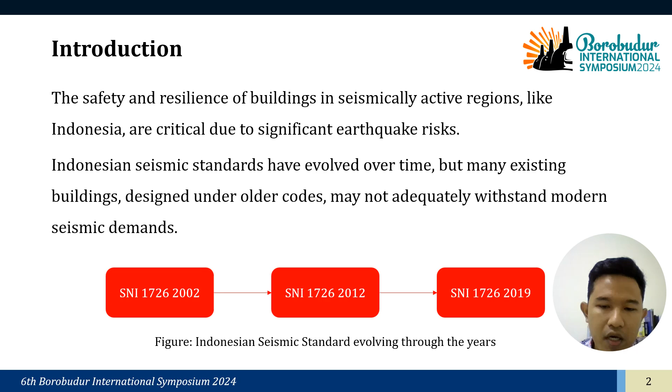Let's get started with the background of the research. The safety and resilience of buildings in seismically active regions like Indonesia are critical due to significant earthquake risk. Indonesian seismic standards have evolved over time, but many existing buildings designed under older codes may not adequately withstand modern seismic demands. We started at the 2002 code, then 2012, and lastly we have the 2019 code.

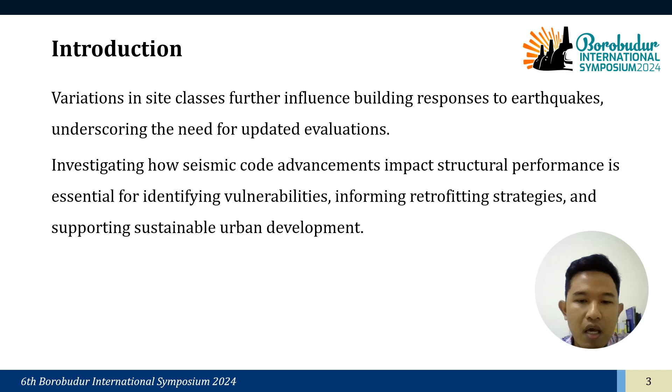Variation in site class further influences building responses to earthquakes, underscoring the need for updated evaluation. Investigating how seismic code advancement impacts structural performance is essential for identifying vulnerabilities, informing retrofitting strategies, and supporting sustainable urban development. This is the differences between the 2002, 2012, and 2019 codes.

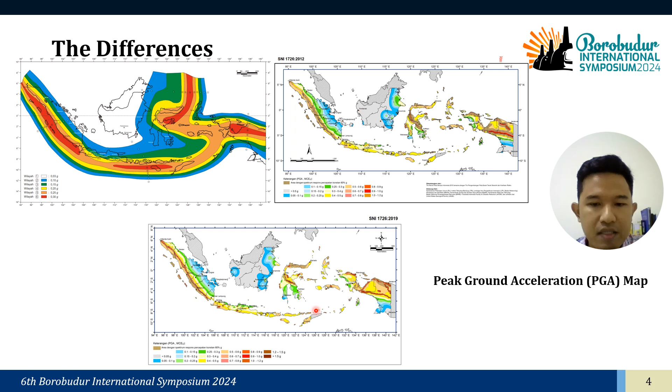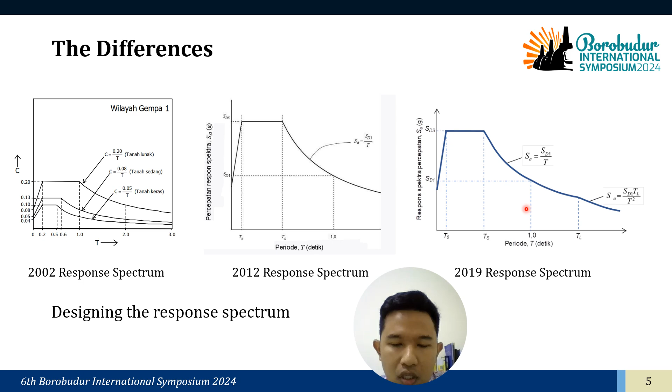This is the hazard map of earthquakes in Indonesia. And this is how we design our response spectrum from 2002 to 2012 and then 2019. This shows the differences between the codes.

In the 2002 code, we only use the zone-based response spectrum. In the 2012 code, we use the site coefficient, and in 2019 we use the same approach. The difference between the 2012 and 2019 codes is in the parameter response of the site class, the FA or FV.

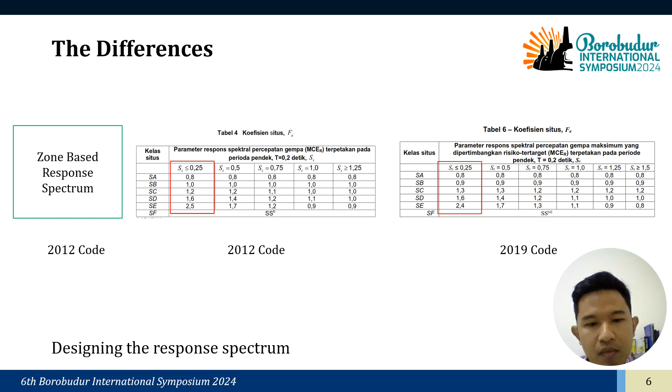So based on this, how does seismic code updates affect the forces acting on the structure, and how does the structure respond to the increased demand for capacity caused by evolving seismic provisions?

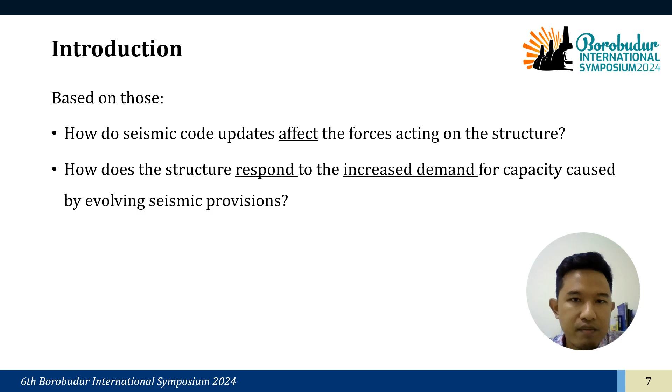The method we use is finite element modeling using ETABS with the data as follows: a four-story building with concrete, grade of concrete 30 MPa, and grade or FY we use 420 MPa.

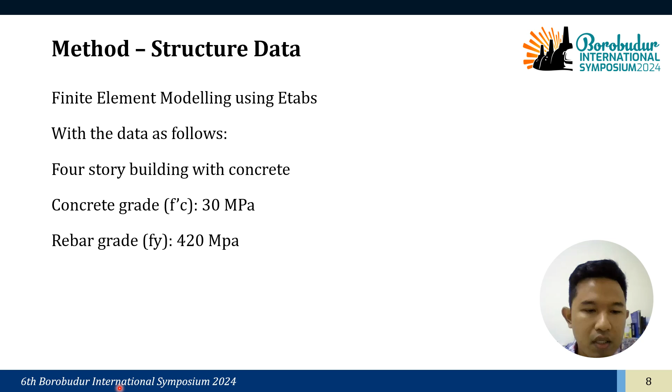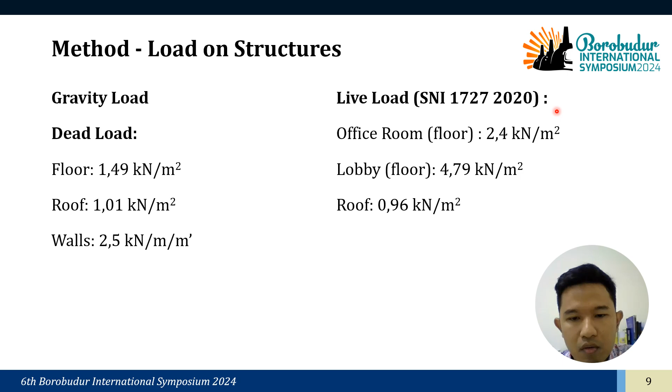The load on the structure includes the gravity load. For dead load, we use on the floor 1.49 kilonewtons per meter squared, on the roof 1.01, and walls 2.5. The live load is based on SNI 1727-2020, with office room, lobby, and roof considered.

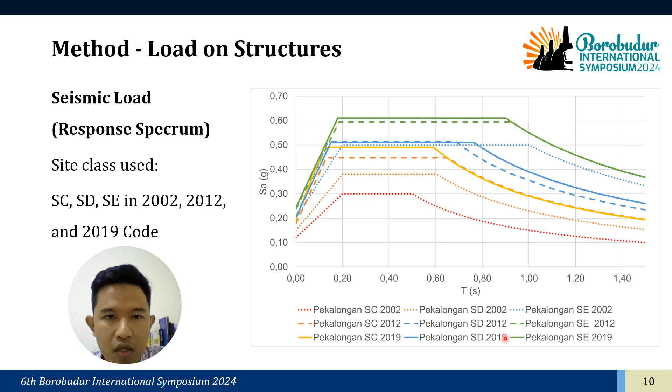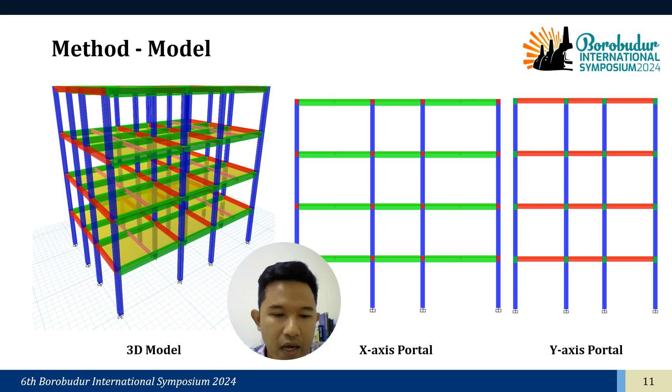We now come to the results and discussion. This is the joint reaction results. As we can see here, at FX for SC, SD, and SE, the EX combination gives higher values than the FY from the EY combination.

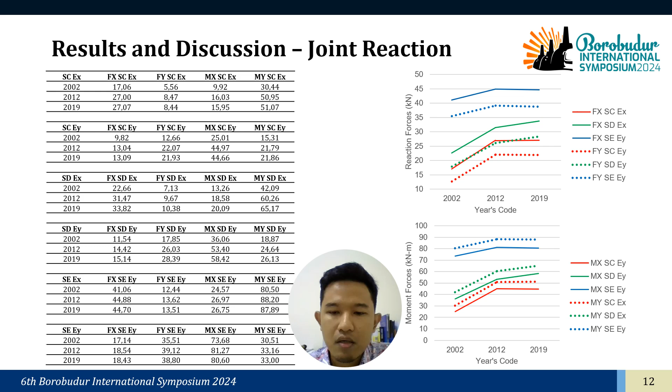Respectively from the bottom, these are the moment forces. The moment forces, specifically MY from EX, actually give higher values than MX for each of the standards.

This implies that from 2002 to 2012, significant increases are observed in all parameters. Site class SC generally shows larger percentage increases compared to SD and SE. SD parameters experience a moderate increase, from around 25 to 45%.

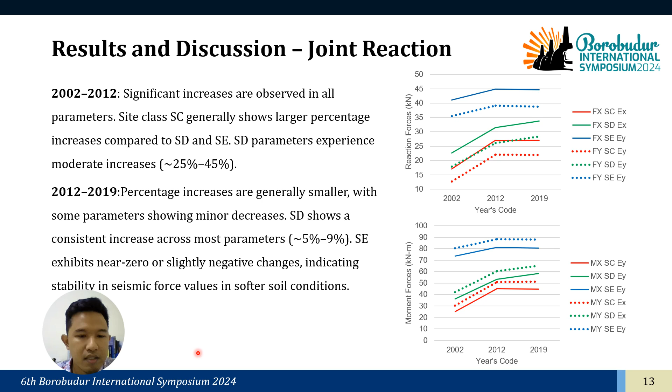From 2012 to 2019, percentage increases are generally smaller, with some parameters showing minor decreases. SD shows consistent increases across most parameters, around 5 to 9%. SE exhibits near zero or slightly negative changes, indicating stability in seismic force values in softer soil conditions.

From the beam forces at the midspan beam, from the shear force or V2, the increase in the shear force over time reflects the evolution of seismic codes, particularly for SC and SD, where stricter provisions led to higher demand on the beams, as SE shows less variation, likely due to higher initial design provision in 2002.

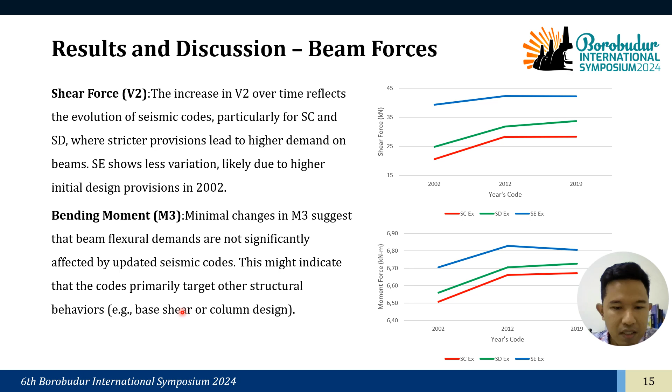And then the bending moment or M3. Minimal changes in M3 suggest that beam flexural demands are not significantly affected by updated seismic codes. This might indicate that the codes primarily target other structural behaviors like shear or column design.

Now this is the beam forces at the end of the span of the beam. Significant increases in V2 from 2002 to 2012, reflecting stricter seismic requirements. From 2012 to 2019, changes are minimal, indicating stabilization in code provisions. Site class SE consistently experiences the highest V2 values, consistent with softer soil conditions amplifying seismic forces.

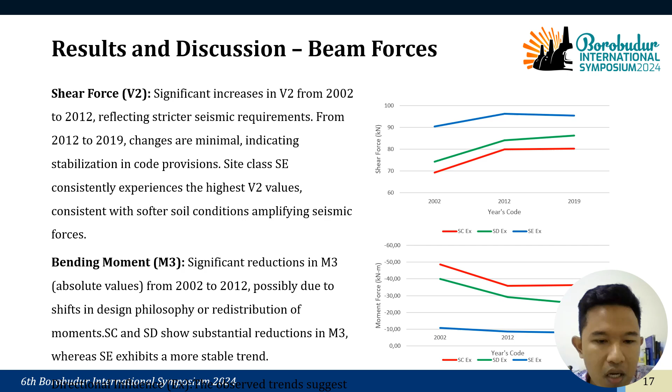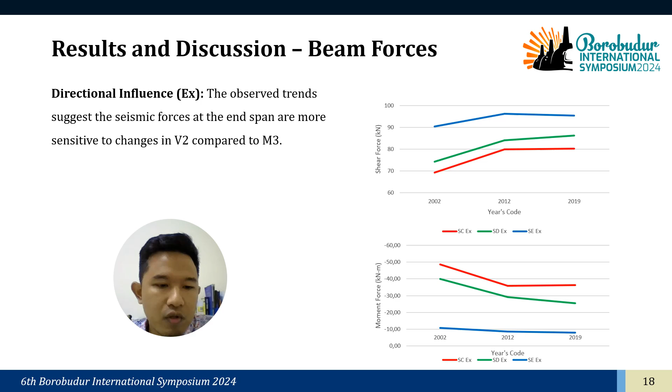For the bending moment, there's a significant reduction in M3 from 2002 to 2012, possibly due to a shift in design philosophy or redistribution of moments. SC and SD show substantial reduction in M3, whereas SE exhibits a more stable trend. This is the directional influence of EX. The observed trends suggest that seismic forces at the end of span are more sensitive to changes in V2 compared to M3.

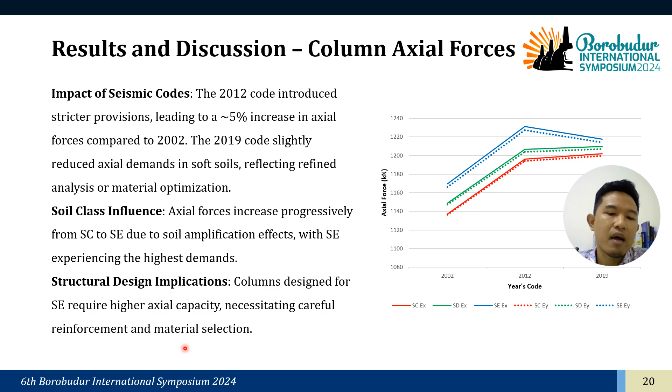The axial force increased progressively from SC to SE due to soil amplification effects, with SE experiencing the highest demand. Column design for SE requires higher axial capacity, necessitating careful reinforcement and material selection.

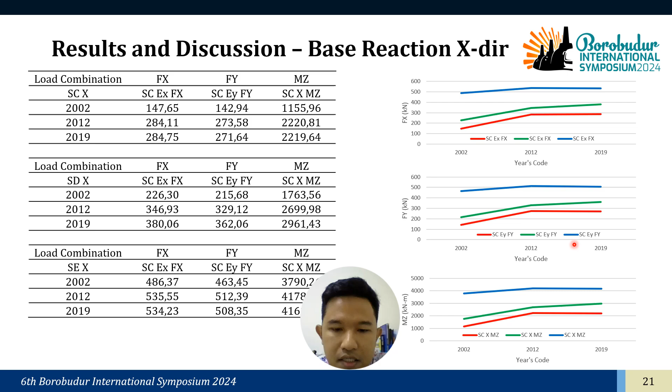This is the base reaction in the X direction, with the data and the graph. The 2012 code significantly increased base reaction demands, especially for hard and medium soil sites.

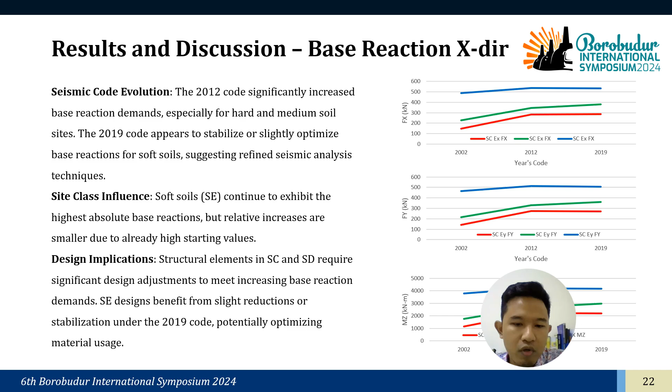The 2019 codes appear to stabilize or slightly optimize base reaction for soft soil, suggesting refined seismic analysis techniques. Soft soil SE continues to exhibit the highest absolute base reaction, with relative increases smaller due to already high starting values. Structural elements in SC and SD require significant design adjustments to meet increasing base reaction demands. SE designs benefit from slight reduction or stabilization under the 2019 codes, potentially optimizing material usage.

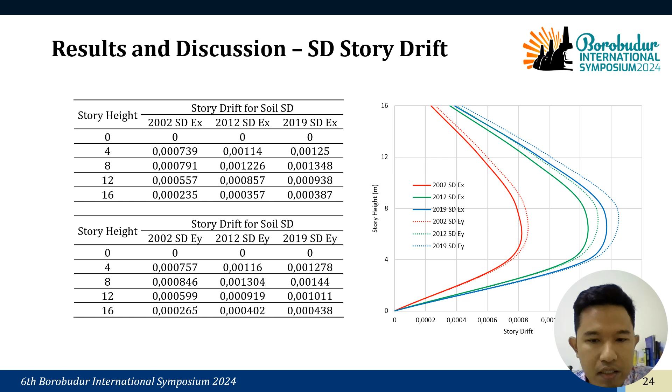From 2002 to 2012, significant increases in drift are observed, particularly for harder soil, reflecting increased stringency in seismic design leading to larger lateral forces. From 2012 to 2019, drift stabilized for soft soil and shows minor increases for harder soil, suggesting refinement in code provisions for soft soil. Soft soil exhibits the highest drift values across all codes due to greater seismic amplification. Hard soils have the lowest drift values, reflecting smaller seismic demands. Medium soils exhibit intermediate values with increasing amplification over time.

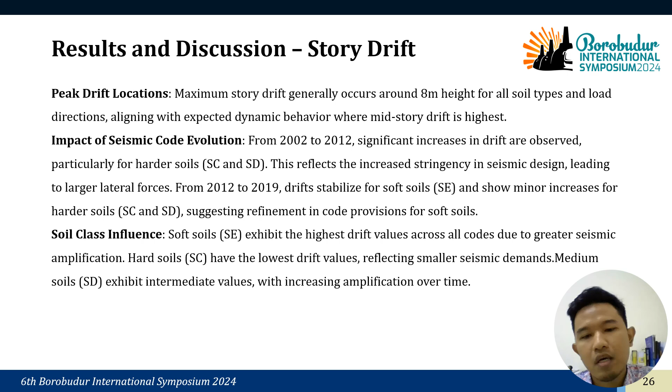Now this is the conclusion. As seismic codes evolved from 2002 to 2012, there was a noticeable increase in seismic forces, which reflects the stricter safety measures in newer codes. The forces continue to stay high in 2019. The axial forces on column and beam force have increased over the years, showing that the structure is required to resist larger forces under newer codes.

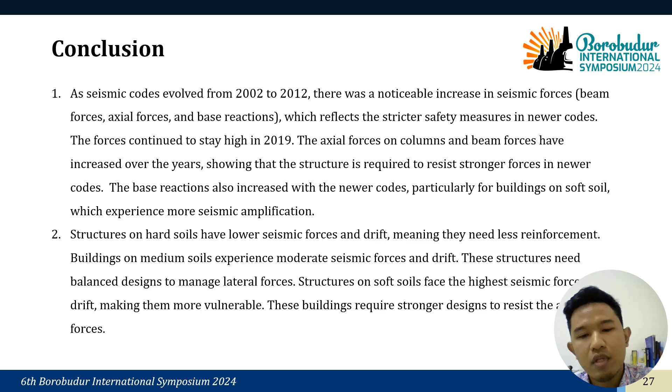The base reaction also increased with newer codes, particularly for buildings on soft soil, which experience more seismic amplification. Structures on hard soil have lower seismic forces and drift, meaning they need less reinforcement. Medium soils experience moderate seismic forces and drift; these structures need a balanced design to manage lateral forces. Structures on soft soil face the highest seismic force and drift, making them more vulnerable and requiring stronger design to resist axial forces.

Story drift has increased over time, especially with medium and soft soil. This means buildings are expected to move more during an earthquake under newer codes. Soft soil buildings show the highest drift, requiring more attention to lateral resistance to prevent structural damage. Drift remains low for buildings on hard soil, even with stricter codes, but still needs to be controlled.

Newer seismic codes make buildings more resilient, reducing the risk of damage during earthquakes and the need for expensive repairs. Modern codes help create more sustainable buildings by optimizing material use and minimizing the need for post-earthquake reconstruction.